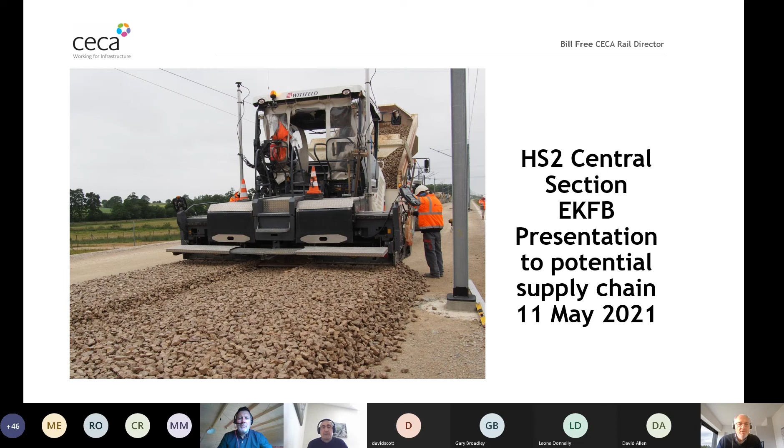Can we move on to the next slide, please, Leone? So I think the key points to note here is the joint venture at the top is Eiffage, Kier, Ferrovial, BAM Nuttall JV. These are all CECA members, as are most of the companies who are also presenting, who are their key subcontractors.

It's worth noting that I know many of you work for smaller companies and are slightly nervous about working as subcontractors, but a big point to note here is that HS2, as the main ultimate client, it's an ambitious project. There's a lot of future phases still to award, and there's a lot going on at the moment. They have fair payment clauses in place that are flowed down through the supply chain.

They have targets to get more SMEs involved in the project. They have very clear requirements for sustainability and safety that people will explain to you.

We had a similar event a month or two ago with the Balfour Beatty Vinci joint venture, who are doing the Midlands section of HS2. And CECA Southern are planning further events with the other two contractors working further south, who also have requirements for subcontractors. One thing that's worth bearing in mind, and the picture I had up earlier probably emphasizes this...

At this stage, this is much more of a general civils project laid out as a linear project than a sort of railway as we usually think about it. The tolerances are higher than most other forms of linear project because the high-speed trains need a very smooth and straight ride, but this is mostly a civils project.

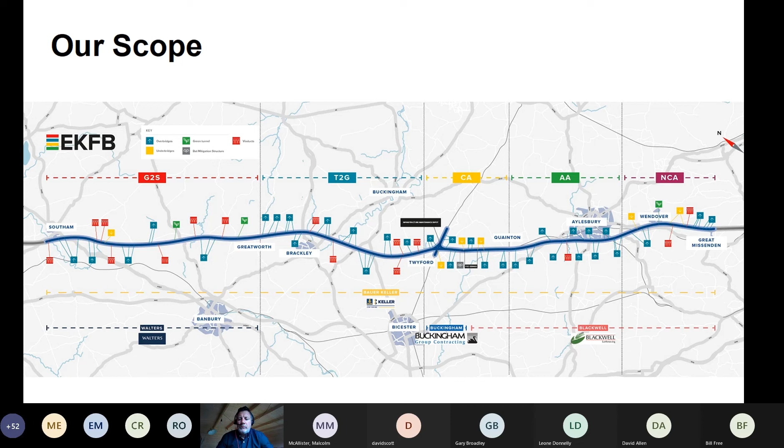Okay, moving on to headline scope. There's 80 kilometres of high-speed line to be delivered, and that's everything up to preparing for the track to be laid - we're not doing any rail works at all. It's all civil engineering works, but there are massive elements of civils and also diversions along the route.

75 overbridges to be erected, and 5 kilometres of green tunnels, which is unique to EKFB and our delivery strategy. This design technology was brought in from Eiffage and the work they did in France. It's a cut and cover tunnel, and the longest one is over 3 kilometres in length, so effectively they'll be backfilled and won't look like there's anything there when we're long gone from the project. It's really precast section construction off-site, which cuts down massively on on-site labour and health and safety risk. That's something we're really proud of on the project.

The numbers are phenomenal: 330 hectares of landscape planting, 17 viaducts to be launched and erected, and around 30 million cubic metres of excavation to be cut and filled. Our supply chain partners, Blackwells and Walters, are front and centre of us delivering that.

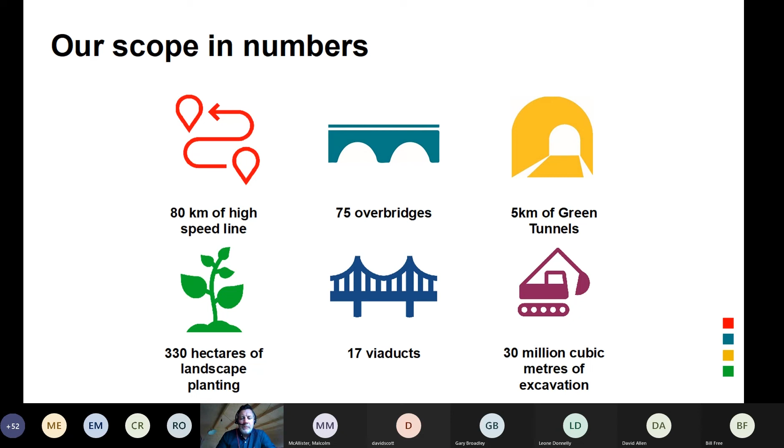So what I'd like to do now is hand over to Chris Read, our senior supply chain manager, who'll talk you through our onboarding and supply chain strategy.

Thank you, Paul. I'll attempt to take control of the slides. Have they disappeared? I think the slides have disappeared, yes. Maybe we press stop presenting. Let me just reload them. Sorry, I pressed stop presenting, Leone. Right, is that mine? Chris knows you should never let me near anything IT related. Absolutely. I'll just forward this once they're loaded, forward them on to where we left it, and then I'll let you take control, Chris. Thank you.

So I guess this first slide is just to show that the opportunities direct with EKFB are really the tip of the iceberg. We've done a lot of procurement and still have a lot to deliver, so there's a huge amount of opportunity there. But if those opportunities feel too big or too risky for your business, there will be a huge amount of opportunity within the sub-tiers of our supply chain. We're putting onus on our tier ones to make commitments to engage SMEs, making those opportunities visible through the same platforms we're obligated to use, such as Compete For.

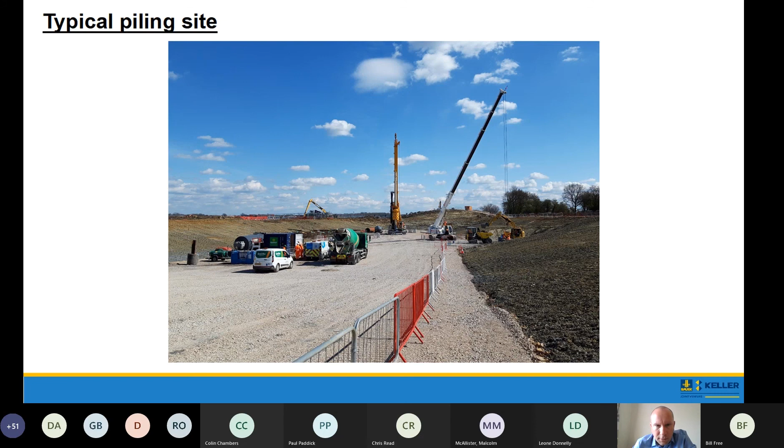On this particular contract, we're also doing all our own spoil clearance. So we've got a 13-ton excavator, a 9-ton dual view dumper, and we're also sourcing all our own concrete, which is coming in via offsite for the moment.

Just to give you an idea of the challenge of C23, there is quite a significant elevation change from the right-hand side, being the south at Great Missenden, through to the left-hand side of your screen, which is the north side at Southam. And we've got quite a big mix of ground conditions. We go through 7 distinct geologies, starting with chalk in the south, progressing through into clays and mudstones and limestones as we progress further north. They all have their own little challenges.

Chalk is generally quite weak, and when we install the piles as bored piles, it can't support itself, so we have to use support fluid. We have about 10 structures needing support fluid in the south. As we progress further north, the ground generally gets a little bit more competent, so we don't need to use support fluid for forming our piles. So we're able to use a segmental casing and then bore the piles out.

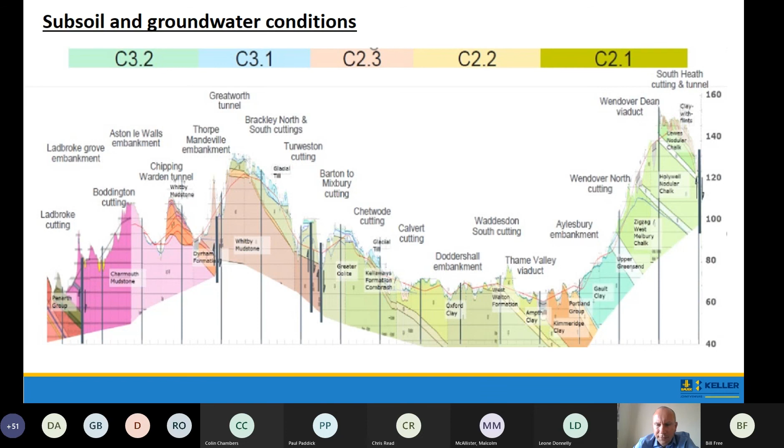And as we go further north into C3, we go through an awful lot of limestone, getting the piles down to depth, which is quite a challenge. So you'll notice the elevation change, which is then driving quite a lot of our scope, so we've got various viaducts, embankments and cuttings. Obviously a train traveling at 400 kilometers an hour can't follow that, otherwise it'd be quite a roller coaster ride, so this has to be leveled out somewhat. So there's quite a lot of piling and drainage work to do for us.

Just to give you an idea of scope, we've got around 50,000 installations to do, totaling just over 500,000 meters. We started last month, and our program runs through until the middle of 2024. We're using various techniques, driven by the design and the ground conditions.

We have some CFA piling to do in the Calvert area, just under 3,000 CFA piles to install through Calvert and going through into around the Oxford Clay. Pressure relief drains, around 50,000 of these to install, which sit under embankments where there's fill to be placed. They're a small diameter sand-filled drain, so quite a lot of them to do.

The bulk of our work, or the value of our work, is in the bored piling, a combination of wet piles and dry piles - wet being support fluid, dry being not. So approaching 3,000 of those and around 70,000 meters.

We're going to be up to around 25 piling rigs in total, pretty much kicking in earnest from next year and going forwards. With our procurement, as Chris mentioned, we do all our procurement via Compete For and using a balanced scorecard. So we're in the throes at the moment of getting our supply chain in place.

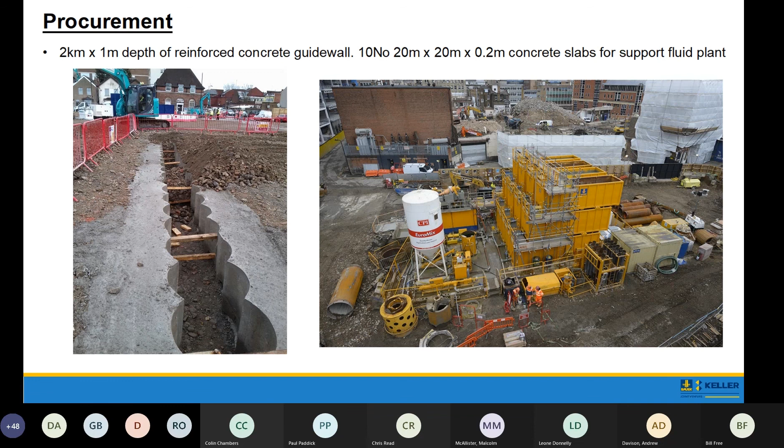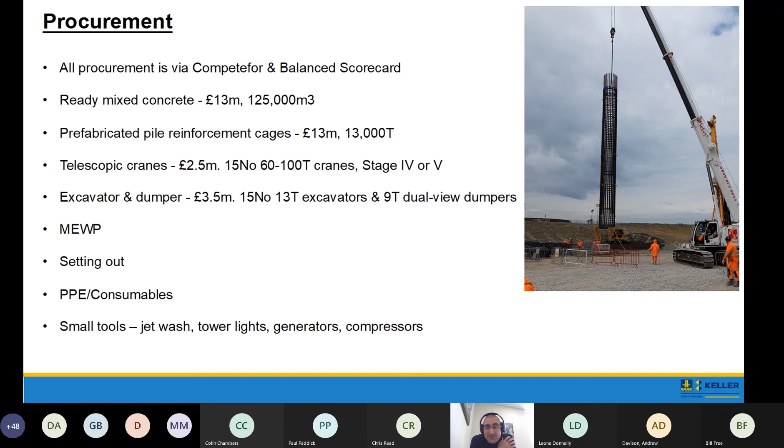Hi, good morning, everybody. My name's Justin Downer, I'm the Assistant Project Director for Blackwell Earthmoving on the HS2 project. Let me get the right slide up. I'm joined by Jennifer Kirkley, our Procurement Manager, who will join in a few slides' time to run through the procurement process and the procurement opportunities associated with our scope on this project.

A brief company history: Blackwell was established back in 1956 by Chris Blackwell, predominantly off the back of the major motorway building scheme and program that was prevalent at the time. Subsequently, we engaged in a wide range of civil engineering projects and developed our soil stabilisation activity. More recently, in 2016 the company was acquired by Hargreaves Services and steered us back really towards our traditional skill set of major earth moving.

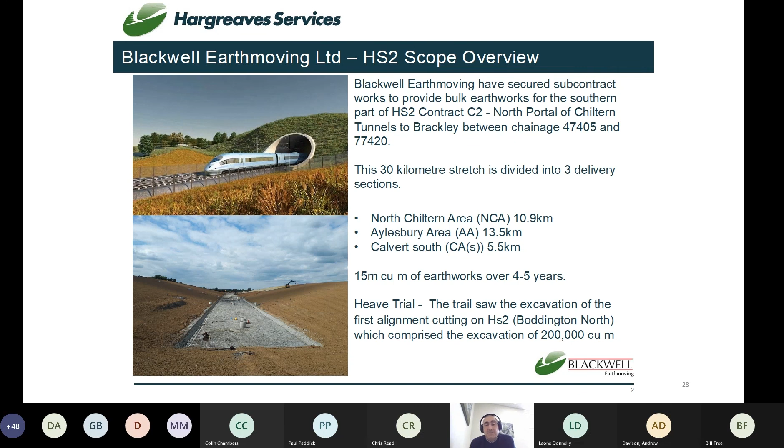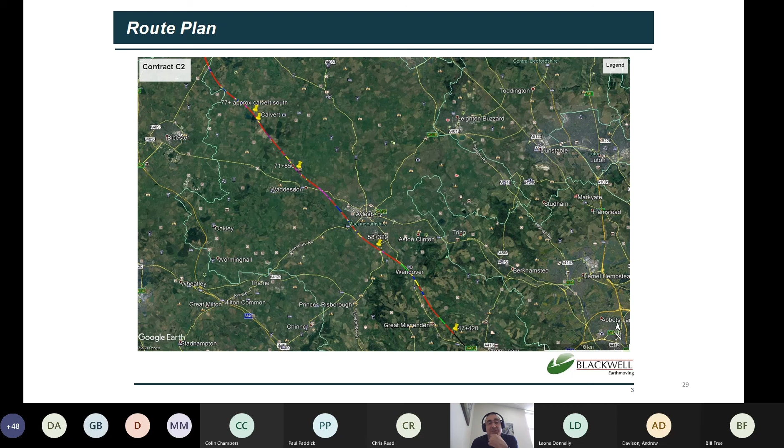Our mission for Blackwell Earth Moving is to be the specialist earthworks contractor of choice within UK infrastructure. We want to be responsible, sharing ownership and accountability for project outcomes. We want to be respectful. We want to be relentless, adopting a high energy, delivery-focused approach throughout the life cycle of the project without falter. And we want to be resilient, ensuring we persevere when challenges and obstacles arise, which there will be numerous of on this project. We're all very much aware it's an incredible feat of engineering to be performed in a very narrow corridor that we all have to work in, and there will be great interfaces that we have to overcome and work together on to successfully deliver this.

At this juncture, I'll hand over to Jennifer, who will talk you through the procurement element of the presentation.

Thank you, Justin. Hi there, my name is Jennifer Kirkley and I look after procurement for the Blackwell Group. I thought I'd start by listing out some of the contacts within our team.

Firstly, there's myself, and my contact details are here if anybody has any questions or queries after this that you don't want to raise on this call. I've also put down Gary Ward's contact details; he's our resource manager and looks after all of the people and plant on the project. We've then got Richard Holman and Lisa Walt. Richard looks after the day-to-day ordering side of things for non-plant purchasing, and Lisa does the same but for the plant side of the project. That team will develop and grow over the coming months, but that's us at the moment.

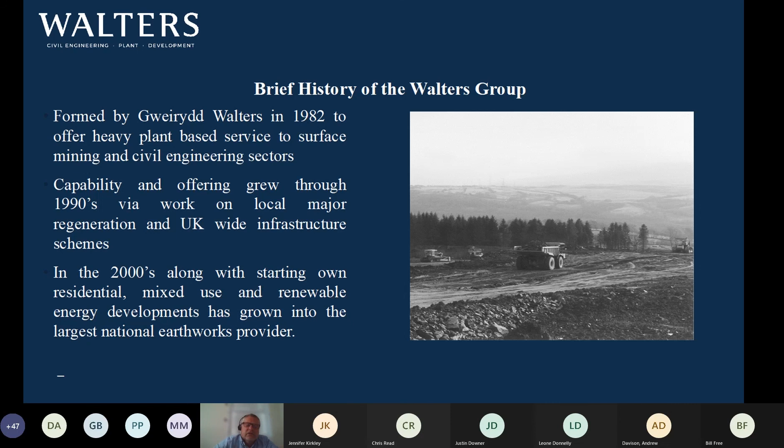And then during the 2000s, along with starting our own residential and mixed use and renewable energy developments, we've grown into the largest national earthworks provider.

Just to give you an idea what the group also does - on the renewable energy side of things we now operate 4 of our own wind farms and 2 large solar parks. We've got our own development lands, predominantly in South Wales but also now in the southwest of England. Our offices stretch from Aberdare in Wales to Bristol and then across to Stratford-upon-Avon. We've also got interests, predominantly via our chairman, in horse racing and equine activities.

On the plant side of things, we've now got around 600 main plant items, which gives us a capacity of probably in excess of about 30 million cube per annum now, which probably puts us as the largest earthworks provider across the UK.

On the EKFB section, we are working on the G2S section of C3, which is from Greatworth Tunnel up to Southam, which is about 24 kilometres in length.

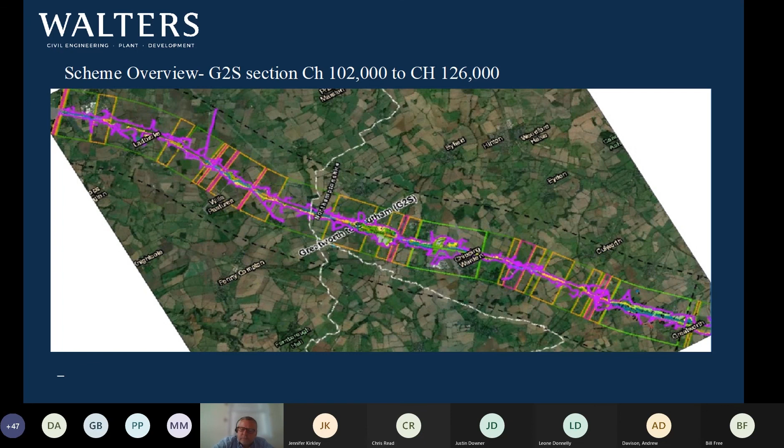This has a quantity of around 12 to 14 million cubes, but by the time you add all the rehandling into that, it's not far off 20 million cube of movement. The average haul we've got is around 2.9 kilometres, but some of that material will inevitably be having to move nearly 20 kilometres.

Within the total cut, we've got around 1 million cube of rock that we're going to need to excavate and process, generally to a Class 1A, but that has to go in as ground improvement underneath the embankments - those are the ones with the longer length of hauls.

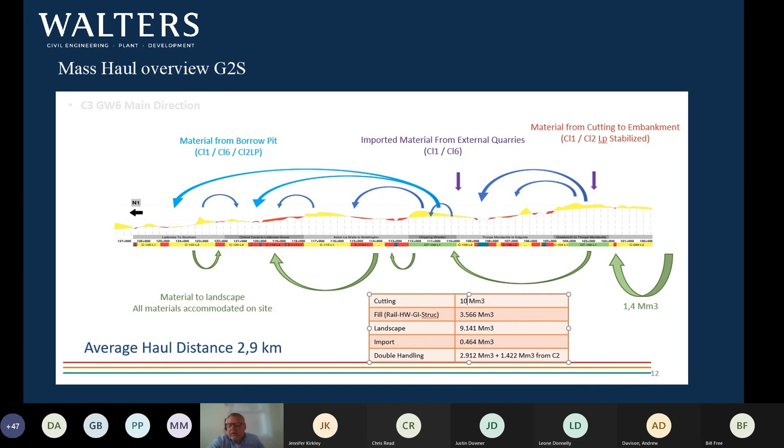The programme of works is over a 4-year period, mostly. This has slightly moved as access has been slightly delayed, but that's across the whole of HS2. There are 2 key earthworks years, which are now going to be 22 to 23 out of the 4 years, which will be moving somewhere in the region of about 7 to 10 million cube in each of those years.

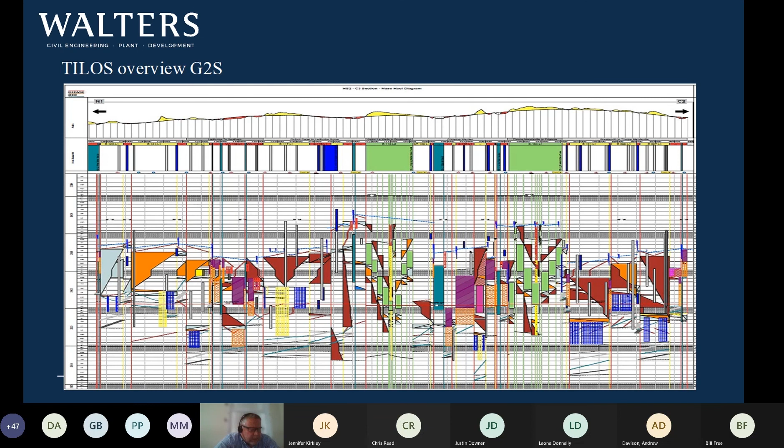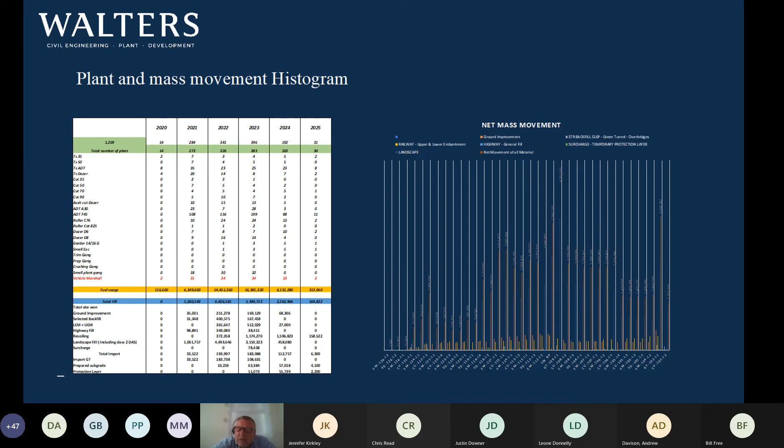Just to give you an idea of the plant we have on there - I know this is quite small on the screens you're looking at - but we're peaking in 2023 with around 400 units on site. To give you an idea, that's a total of about 230 articulated dump trucks, most of those 45 tonne. So it gives you an idea of the size of what we're trying to achieve.

So just in summary, what we're doing is 12 million cubic cut in 4 years. Most of it we are self-delivering.

We own and operate all of our own plant, but for the procurement side of things, for you guys on the line at the moment, our supply chain operators predominantly will be for ancillary earthwork plants, some of the smaller plant that will take out the peaks and troughs, soil stabilisation - there's a great need for soil stabilisation in the upper layers of the embankments - and processing the materials, as we're going to be crushing over 1 million cube of rock over the next couple of years, mainly 22/23, when that'd be underway. There will also be a requirement for maintenance of plant.

As with everybody else, labour supply is going to be key for us, and also engineering surveys. Going forward, we will be looking at utilising the Compete For portal for all of these opportunities. And that's about it for me, really.

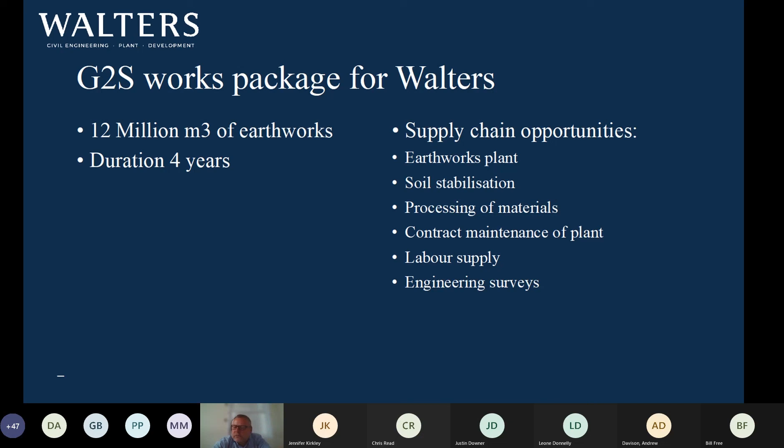I seem to have lost the slides again. Yeah, I'll just reload them.

While Leone reloads the slides, my name's Angus Watson. I'm a chartered engineer and construction director for the Buckingham Group contracting, and my focus is purely on High Speed 2. I'm currently project director for the Calvert North scheme, which has been mentioned earlier in the presentation. I'd just like to thank CECA Southern and EKFB for inviting us to present today as a strategic partner.

I'm going to give you a quick background to Buckingham Contracting, an overview of the Calvert project, and then I'm going to run through the subcontract opportunities that we have.

Hopefully the slides will land before too long. Just to let you know, Angus.

The Buckingham Group is a multidisciplinary building and civil engineering contractor, and our head office is in Stowe, near Silverstone in Buckinghamshire, and we're located about 20 minutes drive away from the Calvert scheme.

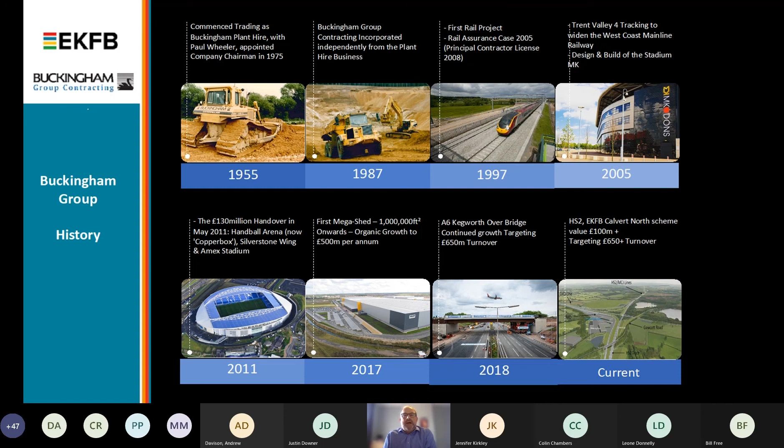Moving through 2018, we'd increased the group's turnover to 650 million. And then currently, that's a shot there in the bottom right-hand corner of the Calvert scheme, which is a project worth over £100 million to Buckingham.

We're involved in a number of divisions within the company. You can see there building, civil engineering, High Speed 2, demolition, sports and leisure, and rail.

We're targeting a turnover of 650 million plus, with our building division being the largest division, about 200 million, and the civils and HS2 division about 135 million and currently 45 million respectively.

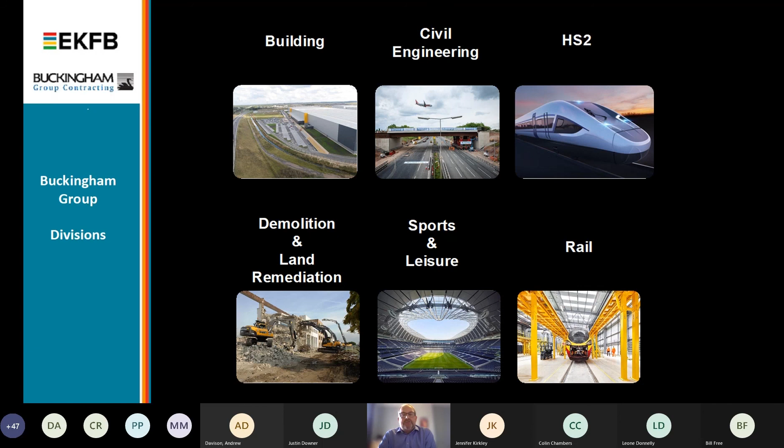We've got a capacity of around 70 million on High Speed 2 moving forward, drawing on resources from other divisions within the business. The sports and leisure side of the business does around 120 million per annum, and the rail sector does around 80 million per annum.

This was a copy of the slide that Chris showed earlier, but that shows where we sit in the management structure on the High Speed 2 environment. So we're a tier 2 contractor reporting into EKFB, and then we've got tier 3 and tier 4 opportunities within our supply chain.

This slide gives a quick overview of the location of Calvert. I think most people will have picked up on where it is, but it's just due northeast of Bicester, and it's the location where the East-West rail line will cross over the top of the High Speed 2.

We've also secured a project on the East-West rail line, a multi-million-pound project, which we're currently delivering in parallel with the Calvert scheme.

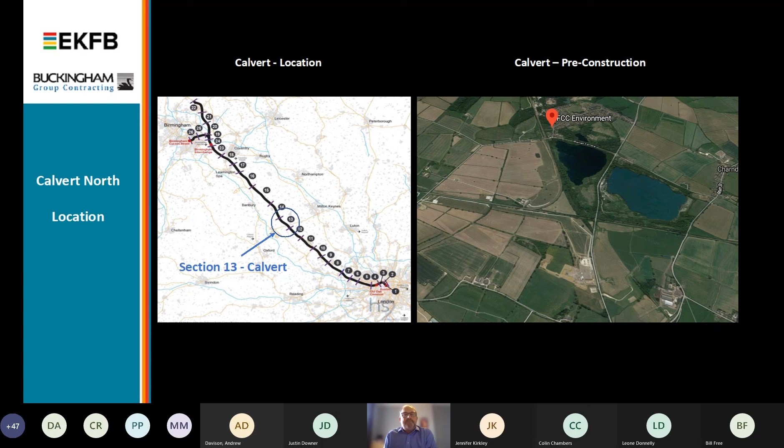We're doing the earthworks for the IMD, but the actual depot itself doesn't form part of this contract.

We've got 7 overbridges, 1 underbridge, a combination of single and multi-span steel composite overbridges and pre-stressed precast concrete deck overbridges. We've got a footbridge over the rail in one location, and we've got 6 quite significant culverts to divert existing watercourses into new alignments.

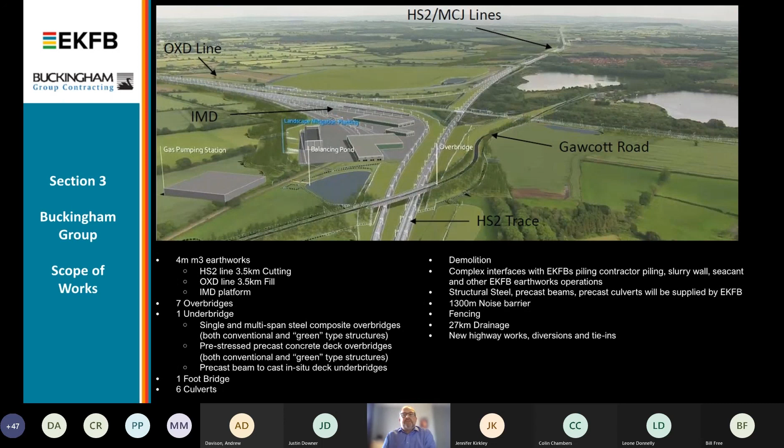Some of the highlights: the top one, the formwork and reinforcement, the FRC package. We've just let, or we're in the process of letting, a package for the first 2 bridges, which is East-West Rail and Charndon Lodge. And we've got a number of bridge structures still to procure, along with the culvert installation and the head walls.

There's a sheet piling package to provide ground support to structures. There's around 50,000 square metres of surfacing, and with that, there's road markings and anti-slip for new highways and temporary compounds.

There's around 2.5 kilometres of safety barrier across the site, 1,700 metres of fencing - close board, timber post and rail, and security fencing - plus parapet installation for all of the bridges.

We've got around 39 hectares of tree stump removal to carry out on the project, a bridge expansion joint package, structural waterproofing membranes. We've got a significant package of drainage to let, 27 kilometres of drainage of varying diameters, depths and types of pipes and manholes. So a huge amount of drainage to deliver on the project.